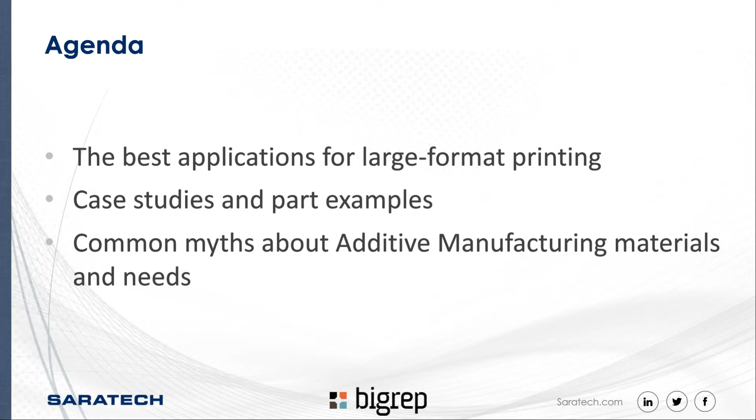So as mentioned before, my name is Marco Cristofori. I'm the head of product marketing here at BigRep. I wish I had as many years of experience in 3D printing as Nicole, but I have 5 years of experience and they're all in BigRep. I'm currently based in Berlin, where the headquarters of BigRep is. I started in the marketing department, but then I moved into consulting, so I work a lot with customers. And then I went back to product marketing, because it was a natural way of developing.

But today, as mentioned before, I will show you a lot of case studies, and I will give you a quick introduction to various applications that can be used with large format 3D printing, including material that we suggest to use, a couple of secrets maybe. We don't go too much in detail with applications, but this can be a lot of seed for talks, and then people can use them to get inspired and understand even better where large format, in this case FFF, can be used.

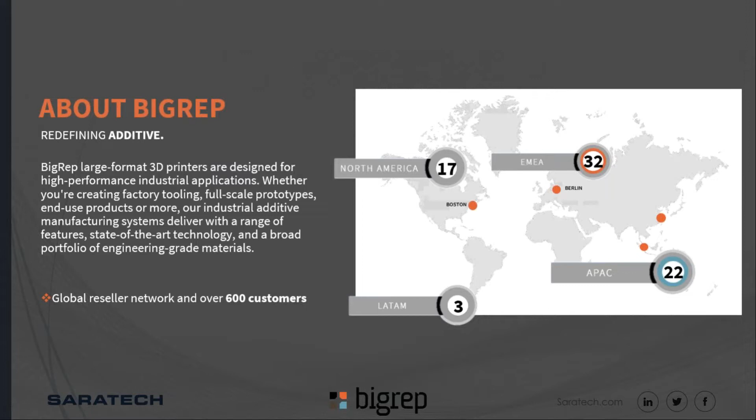Super quickly, introduction about BigRep. We are obviously a large format 3D printing manufacturer. The headquarters is here in Berlin, Germany, but we have other offices in Boston, Singapore, and recently we opened also in Shanghai, and we have several partners all over the world representing BigRep. In the last years, we collected more than 600 customers that decided to join the BigRep family, so they're using large format 3D printing for their applications.

We don't just develop the printer, we have a full ecosystem around it. We also develop our own extruder. We have our own filaments, which today we will discuss a bit. But we are also an open system, so you can decide if you want to use our qualified materials or test your own. The machine will run anyway. And also software, where we have our own slicer, but also other solutions that help you connect multiple machines. So we try to build a full ecosystem to make sure that you're able to start manufacturing from day one.

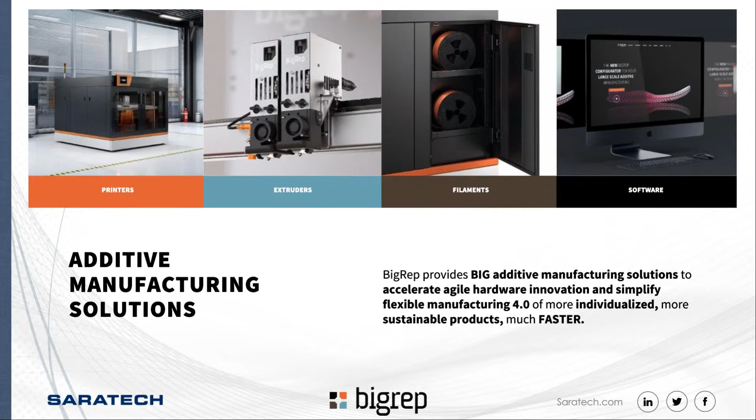One of the things I like most about BigRep, besides amazing technology, is actually the customer community. As mentioned, we have 600 plus customers, but we call them super users because most of our customers are really happy and willing to share what they're doing. So we have dozens and dozens of customer success stories that we keep publishing. I think this is very valuable because a lot of people can figure out faster how large format FFF can be used for their applications.

In this case, for example, we picked 3 from 3 completely different industries. We have Andrew from UK, the co-founder of Phoenix Instinct, who has been trying to develop a new wheelchair, much lighter with a lot of functionality, but it was so costly for him at the beginning. It was super expensive to produce prototypes in carbon fiber because every time he wanted to make a new one, he had to go through CNC milling of an aluminum mold, maybe outsource it and then wait, and then try to have the carbon fiber parts out of it, and then maybe it was working, maybe not.

So the iteration was very long and very expensive until he figured that he could do this with large format 3D printing, and this radically sped up his production and the first phase of development. He got funded and is in production, and he's very happy to support and talk about BigRep. Mikkel is in Denmark.

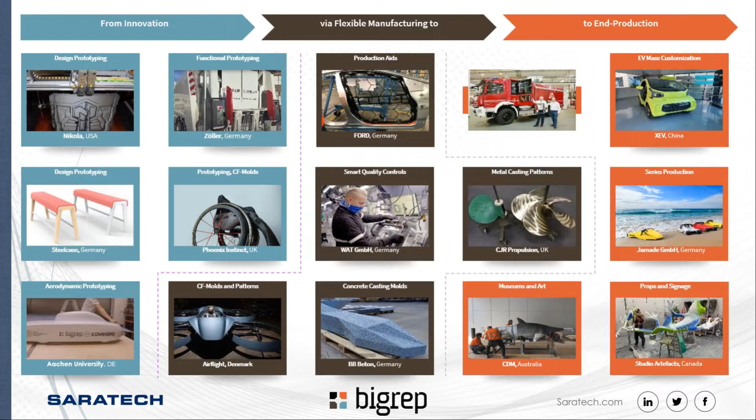And then we have people like Riley, he's a technical manager at Nikola Motors, who's also using large format 3D printing for production aids, so jigs, fixtures, but also prototypes. I'll give you an overview of this table of applications, where you can get a first impression of where large format 3D printing can fit in the production cycle, right?

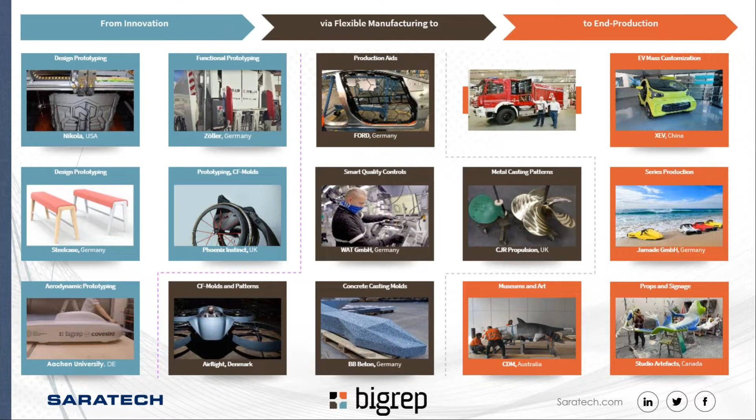A product development cycle. So of course you have the first phase of prototyping whenever you need to build new hardware, large scale, large format. You always have a phase where you probably need to do a lot of iterations, and that's where all the design prototypes come in, or you see bottom left aerodynamic prototyping, but also functional prototyping. Or you also start prototyping for carbon fiber parts.

So you actually print the molds, and then you go slowly into the production aids where 3D printing can support. So there is a lot of quality control. Again, there are molds, patterns, jigs, fixtures, until you finally move into end production, right? So the end-use part.

Of course, if you need to mass produce the same part, you probably wouldn't choose large format 3D printing. But if you have a small batch production, or you go like the guys at Jamade with the water scooter we will see later for mass customization, then it makes sense to go with large format 3D printing. Or maybe you have spare parts, so again a small amount that you just need to manufacture quickly and possibly locally.

Let's start digging in. The first one, we go with prototypes. I will show you some examples again from customers, two of them here. We have two completely different worlds, as you can imagine. On the left we have Zoeller, a company in Germany that manufactures waste collection vehicles, and on the right we have Canyon, a pretty famous bicycle manufacturing and design company.

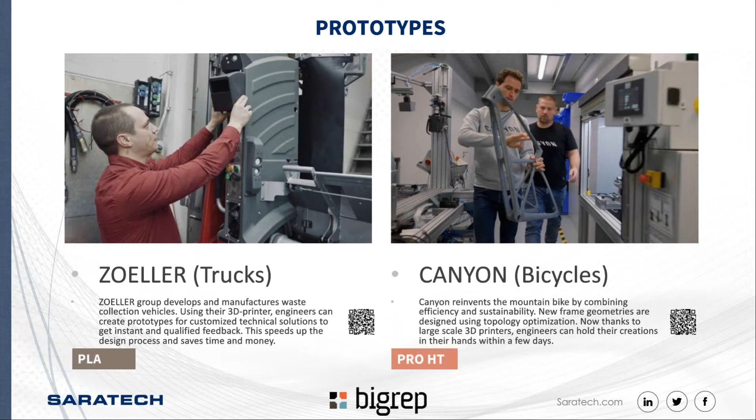Moving on in the prototype world, we have on the right side Steelcase, which is a big furniture company, and they do not print end-use furniture in their case, but again, we're talking about prototypes, so they can really evaluate shapes, design, looks, also the feeling, obviously, before they actually go into production. And this obviously makes you save a lot of time.

In the design world, another thing is that you want to really keep your design in-house before you release a new furniture, because obviously you don't want people to copy it. It's a big benefit to be able to prototype with your own machine locally, so you can keep your design idea in-house, which of course is the same for automotive companies or other companies where you want to protect your IPs.

On the left side is something we developed in-house with the NOWlab, which is the consulting department of BigRep. The Nera e-bike, it's a fully 3D printed e-motorcycle. Obviously, it's a prototype. It's polymer, we're talking about plastic. But here, what we wanted to show is really the flexibility and the agility that you can get by integrating large format 3D printing in your production.

This full e-bike, from the beginning when we started sketching it till we actually had it run, because it's a functional one, took 12 weeks. So we're talking about 3 months. So the time is really shrunk. If you are in this field, you can get an idea of how long it would take you to prototype such a piece with other manufacturing technologies, where you probably will need to outsource a lot of parts. It's definitely much more than 3 months, and this is much more cost effective.

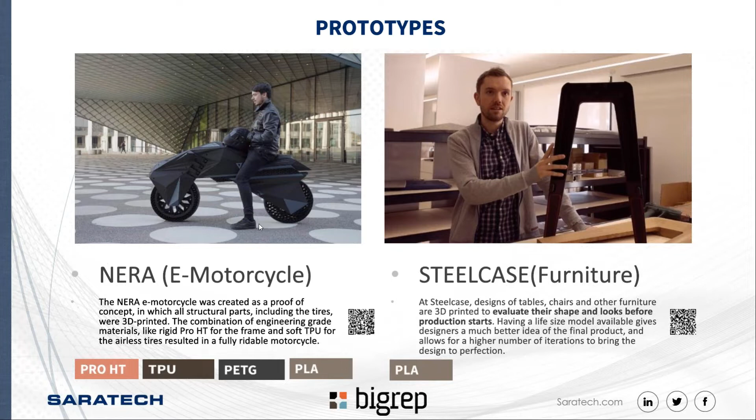We used TPU for the tires, the airless tires, and also a bumper between the two bodies, so they are kind of shock absorbing. PETG for transparent surfaces like lights, so we could have the light pass through. And then we used PLA for the details to add colors. In that case it was blue PLA, but we have other versions that are red, orange. So we use PLA more for decoration, because you have the freedom of color choice, which we don't have with other filaments.

So prototyping is obviously affecting every industry, and it really can help if you need to manufacture large format hardware or several smaller parts. The second application where large format can really help is production aids. You already have a production running, and you have a shop floor in your factory where several things happen. There is quality check, there is control, there are several steps the parts need to go through, and that is where large format 3D printing can also help.

There are several stations or phases in the production where our customers are currently using our printers. One example is on the left. You see WAT, also located in Germany. It's a supplier that manufactures welded steel frames for cars. These frames need to go through a quality check that requires an analysis of specific holes that need to be of specific diameters. So they manufacture several large format jigs and fixtures.

They call them smart fixtures, because they also added several probes that they were able to integrate in the printed part, which helps them to qualify all the parts. So now the user can just hold the fixture, put it in place, fit something in the hole, and then the probe gives a green light or red light, so move forward or not. It's a very big part.

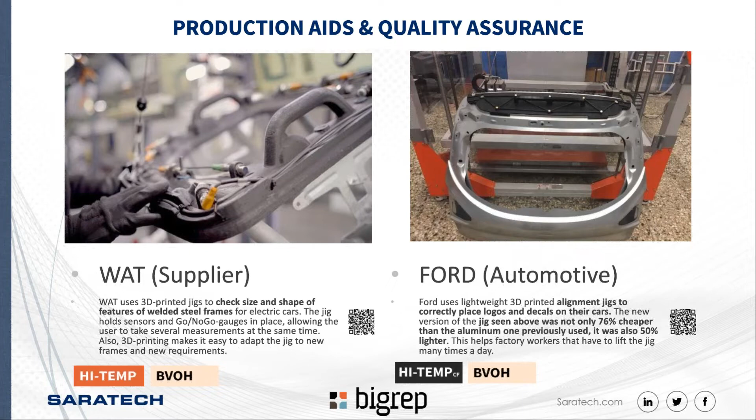It's very interesting how our customers do it, like WAT, for example. They have a BigRep One inside their shop floor, and they have one guy whose job is basically to go around the production floor every day and check what can be improved. Then he goes on his laptop, designs something, prints it, the day after he tests it, and if they see an improvement in time or quality, they implement it. So it's very, very agile, which is very interesting.

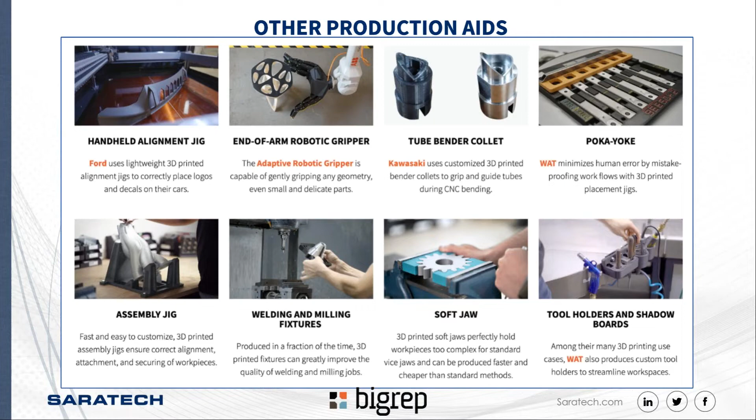The next one we go to forms and molds, which of course is a huge one. There are several industries, but also several applications that can be manufactured with forms and molds. Also here I will have a lot of pictures and examples from customers.

Let's start from the one that is the most requested, which is obviously carbon fiber reinforced plastic molds and patterns. Manufacturing carbon fiber parts right now is very expensive. There are several ways. Obviously, if you go into mass production or if you want very high quality parts for mass production, there is nothing that can replace a CNC aluminum part.

But there are other situations where that would probably be too expensive, which is either when you need to manufacture a small amount of very high quality carbon fiber parts, or when you just need to manufacture maybe a big amount, but it doesn't matter if the quality is high. It's more for fit check or for prototyping. And here are two examples.

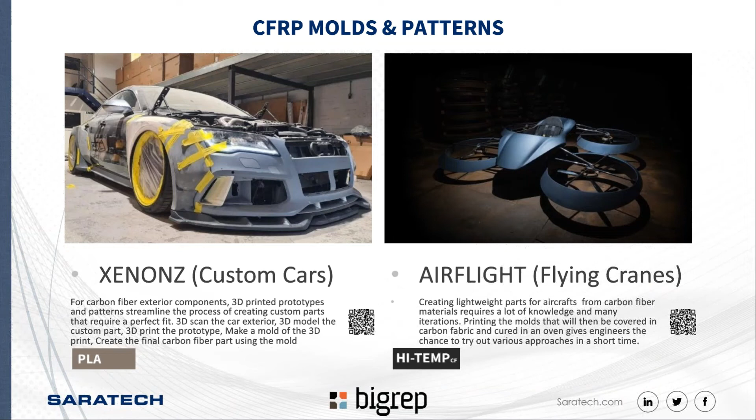So as mentioned, I will show you the two ways you can use large format 3D printing to manufacture carbon fiber parts. The first one is the one that Airflight is doing, on the right, so more for prototypes. You can basically 3D print the mold directly. You can use HI-TEMP CF. You post-process the mold, so of course you sand it, you wax it, everything that is necessary. And then you use that mold to manufacture your carbon fiber parts.

We suggest obviously to have a higher amount of infill, or even to fill the mold with epoxy to make it stronger to pressure, because when you lay the carbon fiber and vacuum it, of course there is some pressure. Of course, you cannot heat it up to a high temperature. We're talking about, again, 100 or 110 degrees Celsius. So the parts you get are not super high quality, but they're good enough as a prototype and to check the design.

And they are 70-80% cheaper than doing it probably with a CNC aluminum mold, mostly if you consider that we're talking about sizes here of like 1 meter by 1 meter by 1 meter. The second process instead is one step more, but you can get very high quality parts that can actually be used for end production, like in the case of Xenonz on the left.

So what you do is you print the pattern or plug. It's called in different ways according to country, which is the positive, the part that you actually want in carbon fiber, right? So you print that one, you fit check it, you test it, and then if you decide to go with that design, you use that part to make a mold, which can be done, for example, in glass fiber, as you can see in step 3 below. And then you can use that mold to make your carbon fiber parts. That mold is not 3D printed, obviously, because it can resist higher temperatures and can actually be used for production of high quality parts.

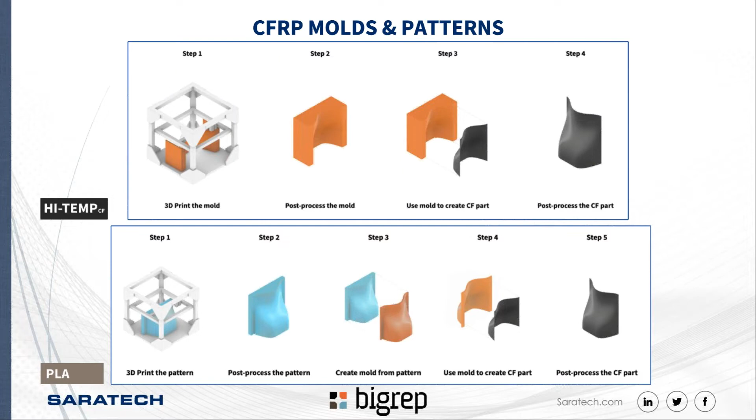Then you vacuum seal it, you cure it at 100 degrees Celsius, and you get your part. It's a very fast process compared with other methodologies, you can do everything in-house, and you can have small productions of parts for your prototypes.

Xenonz, on the other hand, wants high quality parts because customers, of course, want to use them in their cars. So step one, you print the part, the positive, the part you actually want to have in carbon fiber. Step two, you use that part as a prototype so the customer can already see how it looks and can give a go or no go.

If the customer is happy, use that printed part to make a glass fiber mold or whatever other material might fit you. And then you can use that mold to make your carbon fiber parts that are obviously, as you can see in the image, very high quality. You can use them as a visual as well.

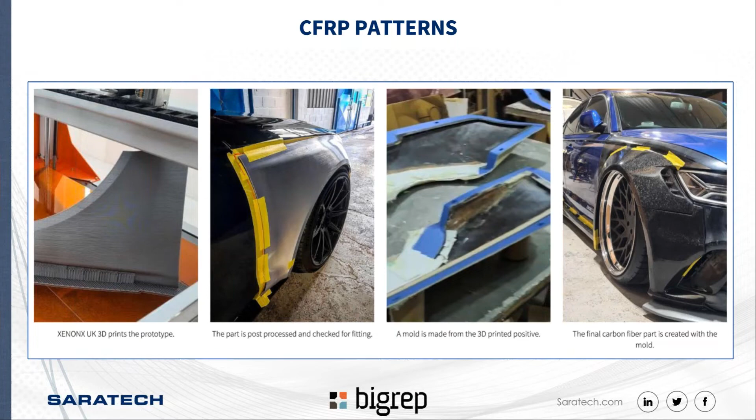Closing the chapter of carbon fiber reinforced plastic, another one where molds and patterns are very common is sand casting. In this case, obviously, we cannot print the mold because we're talking about melted metal, but printing patterns is very common. We have several customers doing it all over the world. I have two examples here.

CJR Metal Casting. They obviously do propellers. Propellers depend on the specific application and need to be customized, in this case maybe according to the yacht or the boat where they need to be assembled. So each of them can be different. They're big. So what customers do is use PLA to print the positive, the pattern, and out of the pattern you can make a sand mold and use that sand mold to make your metal parts.

On the right side is the same industry but a different application. Australian Bell, in Australia, makes bells, and they really cut the cost a lot, both for this company and in general in this industry, if you consider that patterns can either be handmade in wood, where you can imagine it's hard to find the skills, or you can CNC something like 1 cubic meter of material to make a pattern. But first you need a very big CNC machine with various axes.

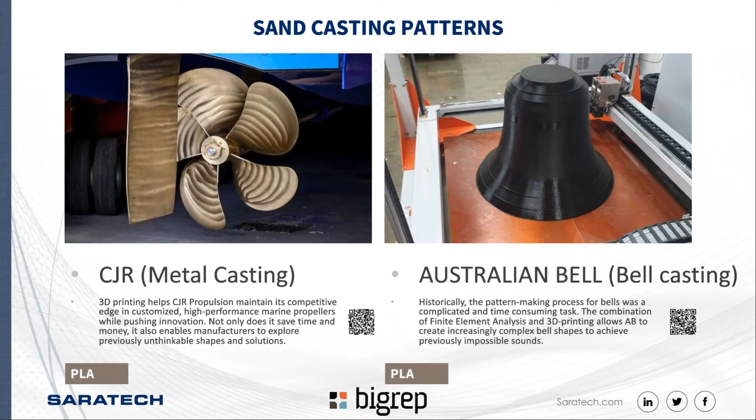As mentioned, the process is relatively easy. You print the pattern, out of the pattern you make the sand mold, and then you just pour the metal to make your metal parts. Of course, I'm oversimplifying the process. It's not that easy if you are someone in the industry. There are some steps in between, but this is the concept, right?

Another thing you can do is actually use the pattern that you produce. Usually, if you need mass production or big productions, a printed pattern in PLA, obviously a plastic, cannot be used many times. After a while, it will start degrading with the pressure of the sand.

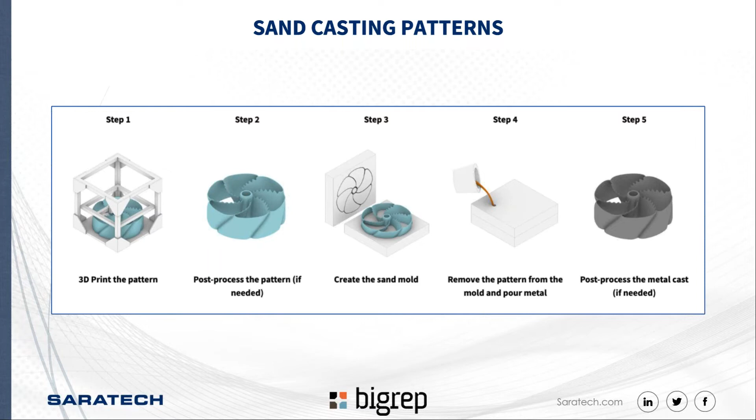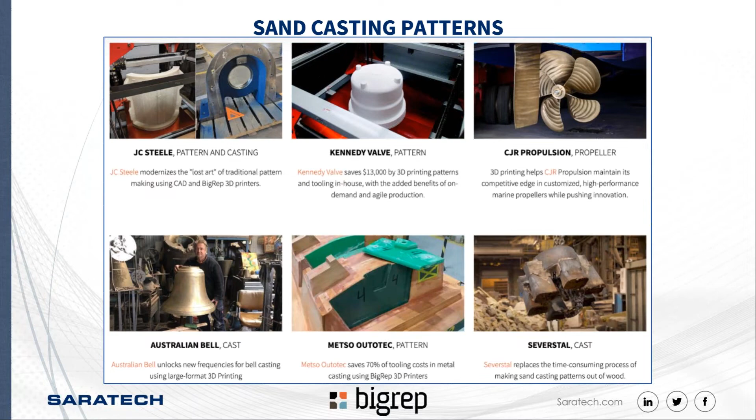Metso Outotec, they have both a Pro and a One in the Czech Republic and in Brazil. And it's also very interesting: they do a hybrid. Let's say 80% of the pattern is always the same, so they keep it in wood, but only the sections they need to change are printed parts. So they can really customize just by assembling small pieces on the main wood pattern.

Quickly, we go through also concrete formwork, which is another one in the mold industry. So obviously this is relatively simple. You can obviously print the negative of the parts you need to make in concrete. Concrete is not too hot, there is nothing that our filament cannot resist. So it's used quite a lot.

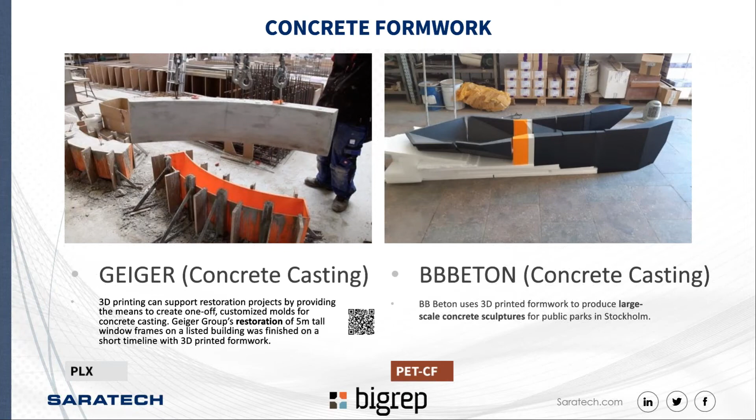So the 3D printed parts, as you can see also on the Geiger on the left, is only the shape, but then you use the wood to make all those elements that can be structural. So you save time in 3D printing, and you can use flat pieces of wood.

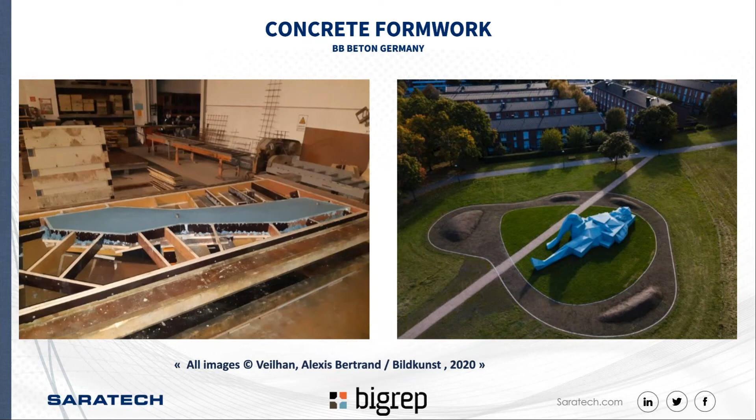Here, just an image of the BB Beton sculpture that they made. On the right side, you can see the sculpture and the sides. The buildings on the back give a scale. So it came handy to use 3D printing, mostly in the section where there are a lot of triangles, so it gets a bit hard to make the full shape in wood.

CNE, which is a local engineering company, jumped in to support, and the guy was able to use his BigRep ONE and Studio to manufacture these large format molds that he used to pull several of those covers in urethane. So he basically just printed the molds and then poured the liquid urethane inside, which cures at reasonable temperature. So it was, let's say, a quick win.

Obviously, there are a lot of engineers behind it, but you can also find a video on our website where you can get more information. But another interesting application where someone who had access to a large format 3D printer was able to solve a problem very fast compared with other manufacturing methods.

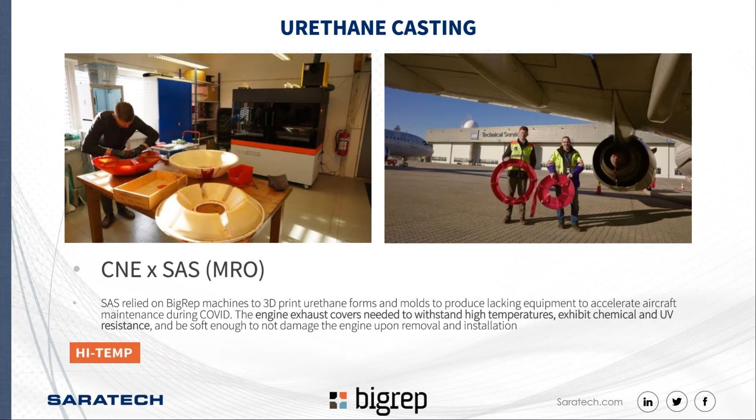So the guys at Magirus obviously have a fleet of fire trucks. That's what they manufacture. And they realized that only having the top window was not enough. They needed a window for the fire workers to be able to look down, so when they were jumping out of the fire truck, they knew exactly what to expect outside, so they were not risking being injured.

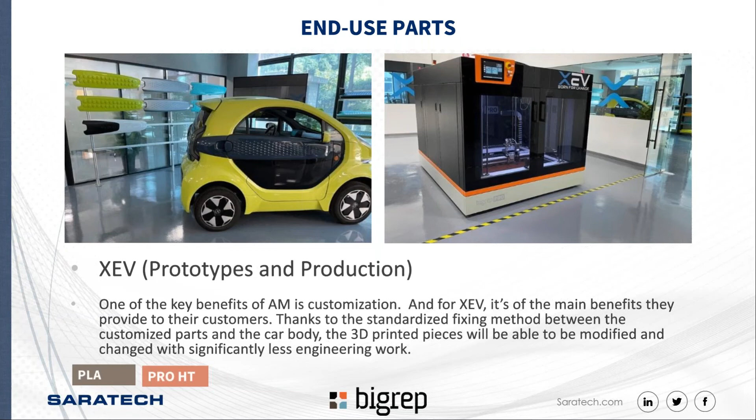So they both have a BigRep STUDIO, and they use them to literally print parts that they can use on cars. They maybe repair vintage cars, or they simply customize existing cars for customers. Before, we saw some exteriors from Xenon's UK with carbon fiber. In this case, it's interior.

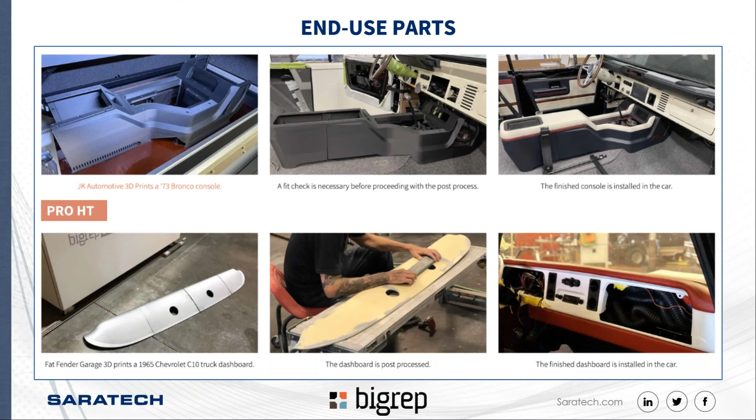And one of the last ones is the design and architecture world. Obviously, here is where a lot of end-use parts can be printed. A lot of furniture with generative design can be used. Also, you can use recycled filament.

As mentioned before, BigRep is an open system. So yes, we have our own filament, but you can freely test your own filament. So there are a lot of solutions now, for example, for recycled PET. So we have a lot of customers that are manufacturing furniture or design pieces with recycled filament.

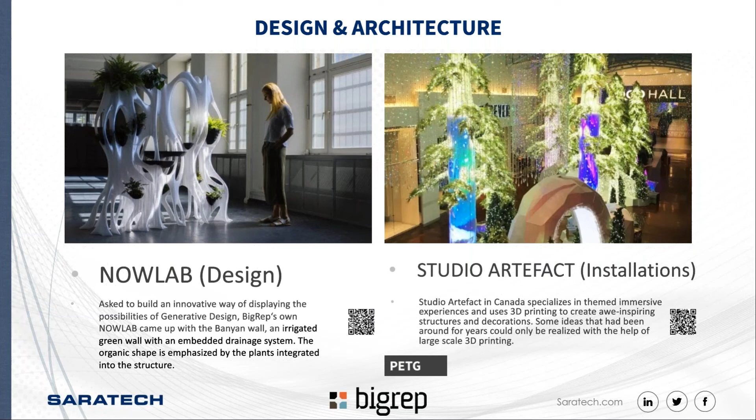Or Studio Artefact, for example, on the right, they have 6 BigRep ONEs. They're based in Canada, and they really manufacture a lot of beautiful designs for events, for trade shows, for molds, or for general installations. I have a few more pictures from them here, for example. So these are all pieces from Studio Artefact.

There is a giant frog that was for something in Las Vegas. I think it was Bellagio. The Bellagio was also the one on the right. You can see the frogs, so you can imagine how big the thing is. And in the middle is a sculpture they did for Burning Man. They have 6 BigRep ONEs. They love PETG. They only print in PETG because it's easy for them to post-process, to paint.

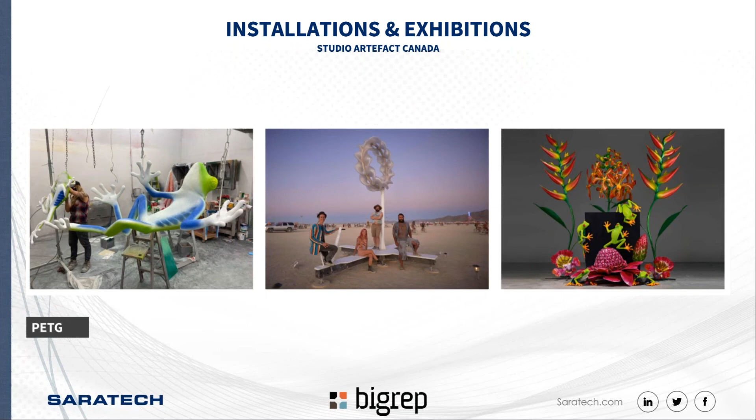But also we have other customers like CDM Studio in Australia that manufacture a lot of pieces for museums, and installations. In this case it was for the Western Australian Museum. So they needed to rebuild their fleet of dinosaurs or other, let's say, animals or things that they need to exhibit. So the studio was able to take over the projects thanks to their BigRep and deliver pretty fast.

So they were able to just sculpt in their 3D modeling software like Blender or whatever they had, and then from the software simply start printing the parts and then post-process. So you can see how huge those sculptures are. And if you compare with how those 2 companies were doing it before, which was a lot of handmade work, for example, working with clay and then post-processing, now they're much more agile.

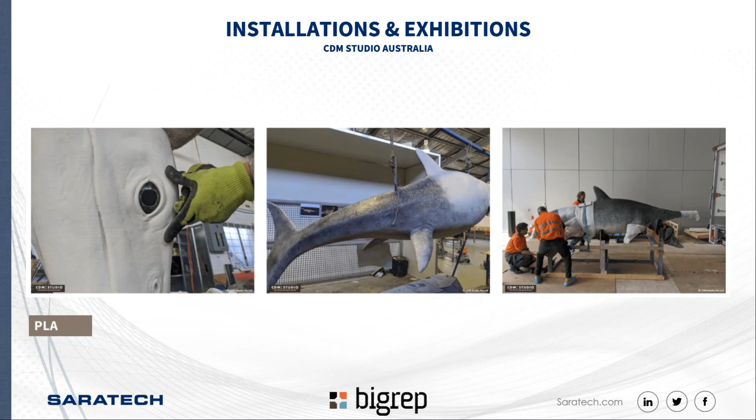Again, if a customer has some feedback and wants to change something, they can just change the model and 3D print it again without going through the process of hand sculpting, which obviously is a lot more time consuming. You cannot do it all day and night.

And the latest is research and education. Obviously, this is a bit like all of the ones we saw before together, right? With the university focus, you can unlock a lot of applications for your students to actually start using new technologies to develop their projects. And we have dozens and dozens of universities around the world who decided to purchase a BigRep machine, also because, of course, of access to funding, etc.

I wanted to give you just a quick introduction to the printers we have at the moment in the market. As you heard me mentioning BigRep One, Pro and Studio before, the BigRep Studio and Pro are more our industrial line, let's say. The Pro and the One have in common the build volume. They're both 1 meter by 1 meter by 1 meter build volume, so 1 cubic meter. The Studio is the smaller sister of the Pro. It's a quarter of a cubic meter build volume, so 50 centimeters by 1 meter by 50 centimeters.

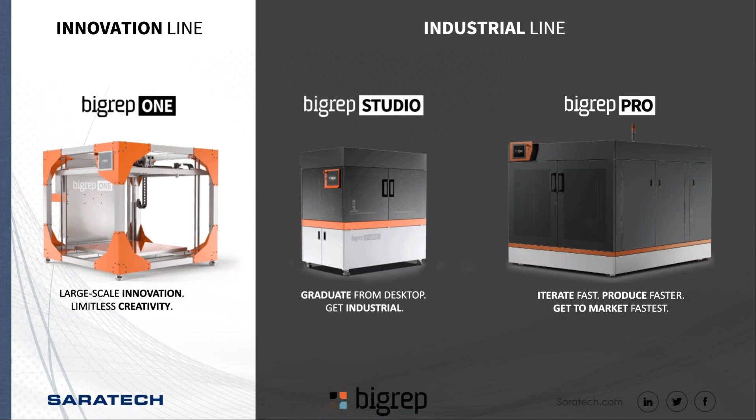Marco, are there any materials BigRep is working on that you are able to share? We keep developing and qualifying lots of materials. As mentioned, we are an open system, right? So first of all, we are always very much open to hear suggestions from our community or customers. If someone needs something specific with some specific mechanical resistance, for example, we can test it and see if we can qualify it.

From our side, we are working right now on PA12 CF, for example, which will be released soon for the BigRep Pro and the Studio. So it's the next step of fiber-filled filament. It will be much more temperature resistant and a much stronger filament. Also very suitable for carbon fiber molds and patterns.

We're working on different water soluble solutions to make sure that they fit every application. And obviously we are also looking into, for example, ESD filament, right? So also for production aids, it's something that our customers require a lot.

It was so great to learn about the molding applications and the end use parts. I had no idea that there are so many different companies out there using the BigRep technology for these types of molds. I really just want to talk about how great it is adding BigRep into your existing workflow and how it can help your business today to ease your supply chain bottlenecks, shifting the complexity of your system into the advanced technology of BigRep, expanding the use of your large format 3D printing when you need to swap in and get parts fast.